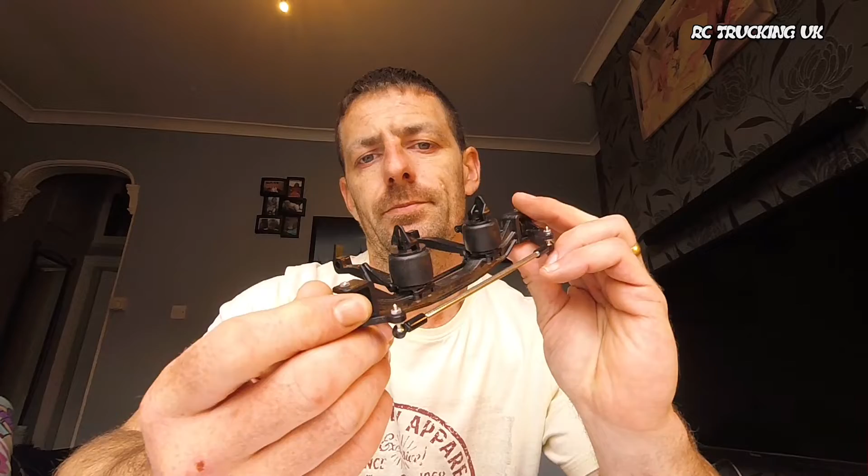That was the airbags, fitting these airbags. It was a bit confusing because we didn't know it would have worked out until I'd actually put it together with glue. If you remember, I was on about the original being on the springs. Yeah, it all worked out with glue. It held up alright, and they do rotate and position into place where you need them to be. So I'm really happy with that in the end.

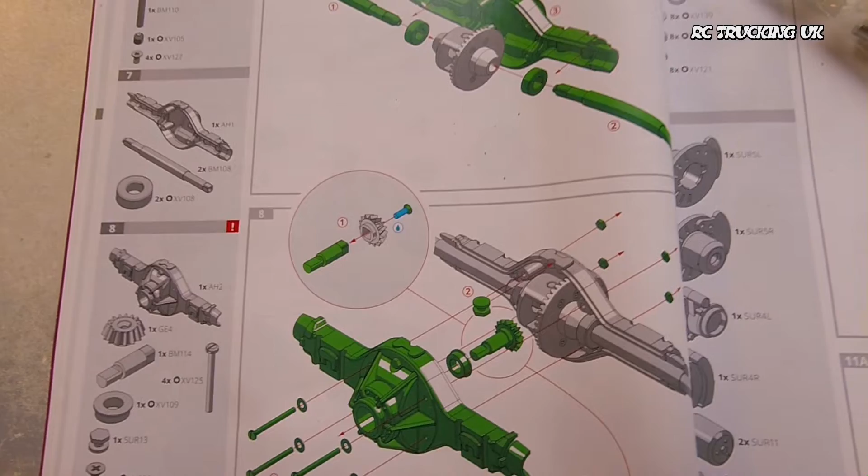In this one, moving on, we're going to be constructing up the rear diff. Now it's only a few parts - I've just popped all the parts needed into this little bag. There's not much, and we're just going to do this step 6, and then we'll come back in another video and do step 7 and step 8, which is the rear axle casing and the bearings and the little drive diff, the gear that comes off the prop shaft to rotate the diff. We'll do that in the next episode, and that'll be step 7 and 8 out of the way. Then it's coming on to basically the rear axle mounts and the arms for where to sit the axle and stuff.

Yeah, that's much more progress. Then it's the airbags and prop shaft, and then I'm presuming onto the chassis point. So I'm going to break a lot of this down now to make it more of a simple step by step, and it's not too much. So, the rear axle diff.

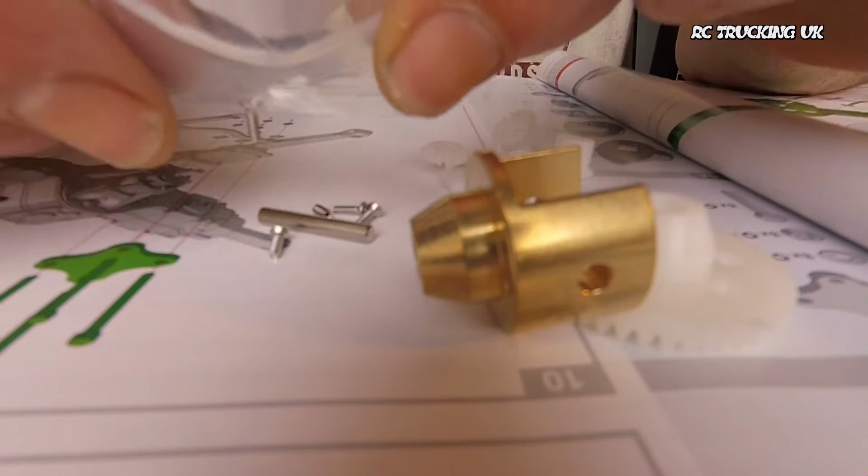First things first, I'm going to just trim up all these little part edges where we've broken off the trees, and get them all nice and neat.

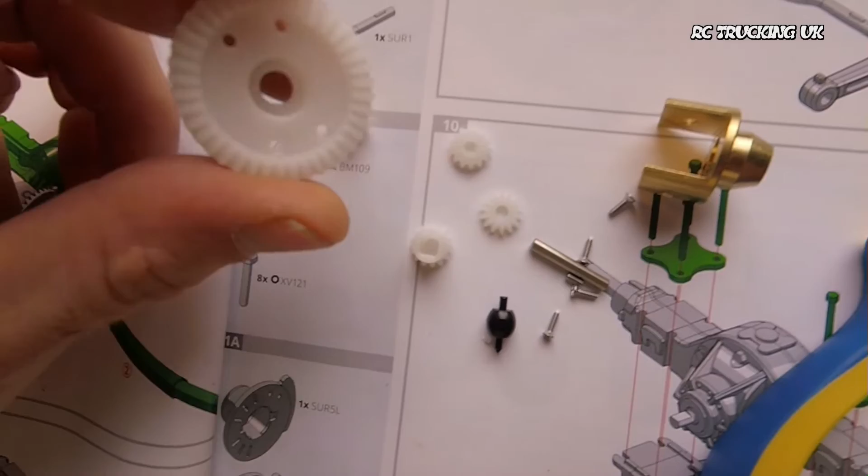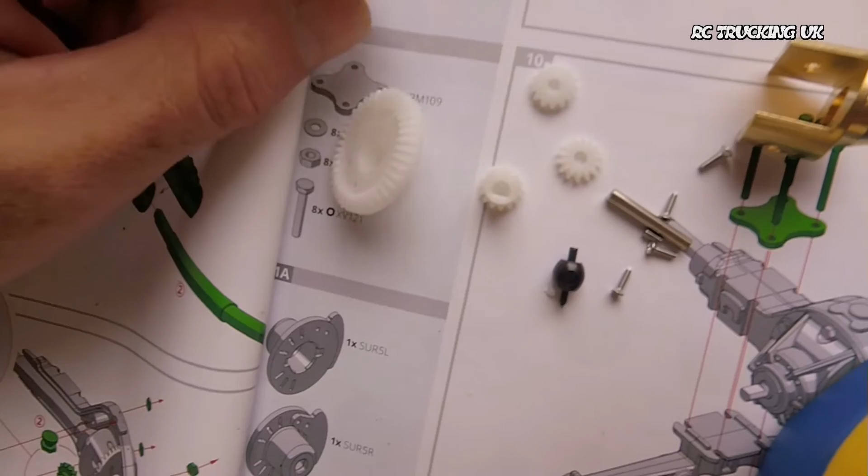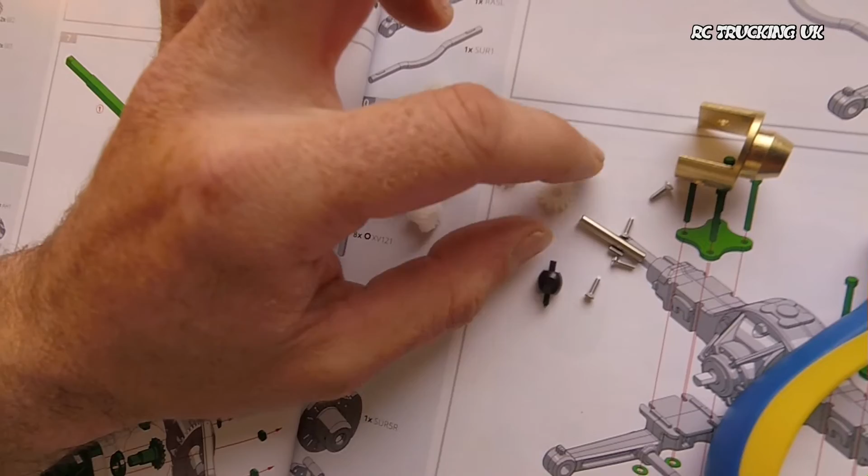So now that's all done - you may have noticed these gears are constructed from nylon, not the usual metal diff gears and bevels you'd find in the Tamiya. However, this isn't a fast running truck, nor is it going to be under any stress - well, mine in particular isn't. I don't know about yours, but nylon does have a good reputation of holding up. No doubt there may be metal gears you could replace these with in the future, or if you shopped about you may find these in metal. But it's not an issue to me.

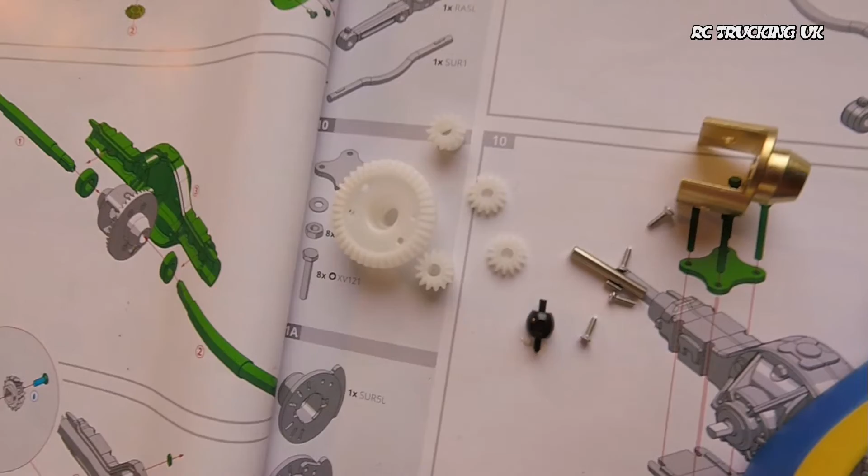Anyway, on to the first part. The first bit is I'm going to need this, that is metal. There's smaller ones and your taller ones, so we're going to need the taller one, and by the look of that, that's going to just sit inside this little hole there.

This is where it may get a little bit fiddly. Is there a front and back to that? No. So this one's going to go into there. This is fiddly because we have to then get these little gears - one's to sit on the bottom with the gears facing toward the middle, and the other one is to the top, and then we're going to hold it all together at this part here.

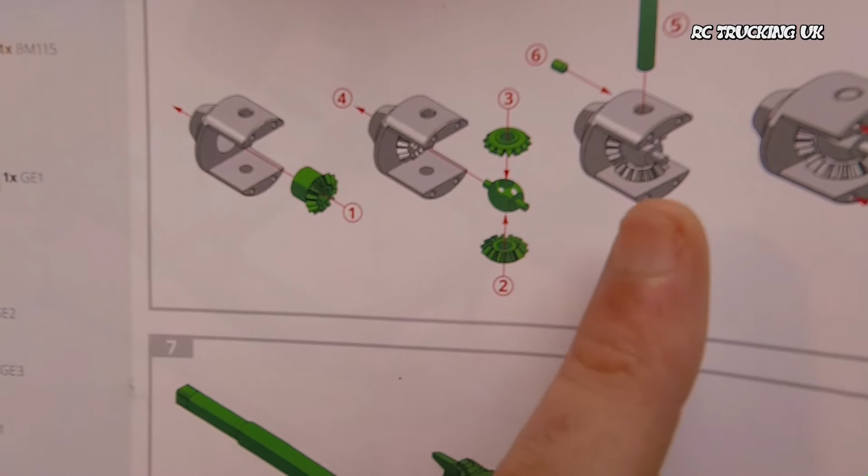There we go. A little bit fiddly, but you can kind of see how that's gone together. So now we're going to need to hold this bar in with a little grub screw here.

So we've got a small grub screw there. Now it doesn't say anything as to needing Loctite - there are areas in the manual where Loctite is required, but it's just going to bite against that arm through there, and that'll just prevent it from falling out. So we're going to need a really small Allen size bit. Now then, so now we've got a nice small bit, and that is an H09, so it's a really small Allen key.

Now we're just going to screw that into there basically till it bites, and then just give it an extra little tighten up. There we go. So it's not too difficult, but a little bit fiddly.

Now there's also no mention of greasing these gears either, however I will be using some grease. So now the next step is the other taller gear bevel, and that's just going to sit basically against the other two flat ones, and that will sit over it there on the top, locking it into place.

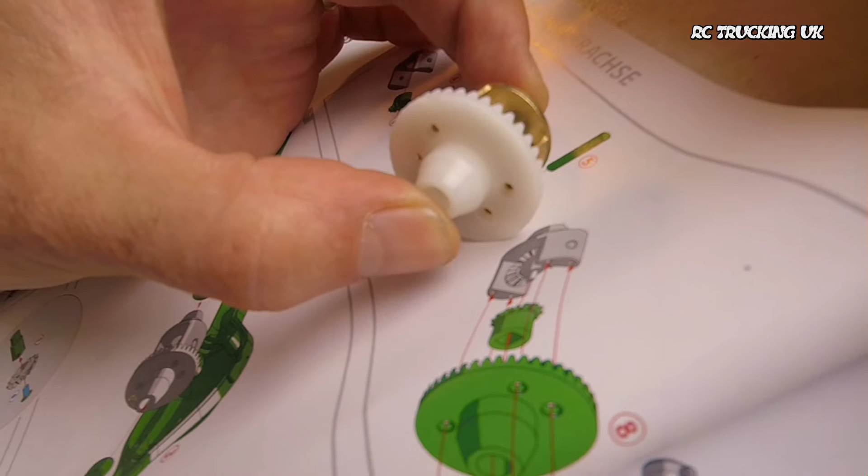Then to the rear we've got the 4 tiny screws, and that's just going to thread through the little threaded holes on the back of the big brass bit there. I'm not going to tighten them up yet until all 4 are in - I'll just work that in like a little cross motion. Then just give them all a little bit finger tight again, just to make sure that they're all tight enough in place, but not over tight.

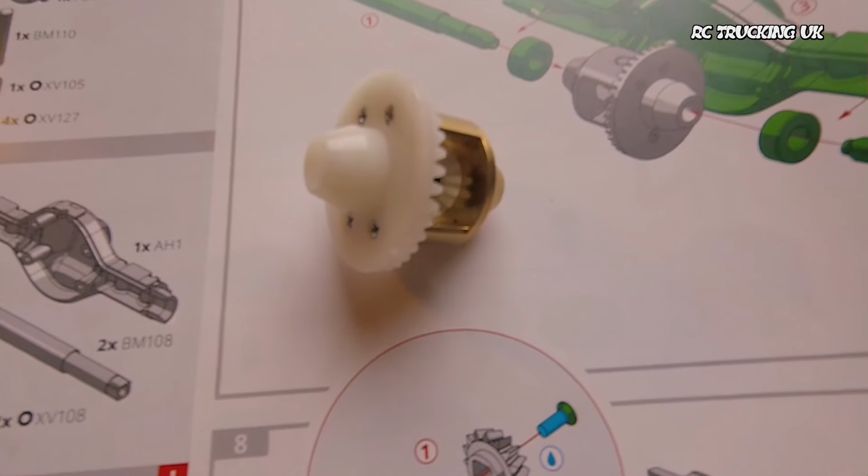And that, guys, is step 6. So a relatively easy one, and in the next one we'll come back and do 7 and 8 of the axle housing and the other gear to drive the diff.

Slowly making progress, enjoying it so far, and getting a bit more eager to see more as it comes on. Yeah, I'm actually looking forward to getting it finished. Still no wiser with the colour choice yet, which I really do need to start booking up and having a serious think on what colours I do need. Then I can start getting some parts pre-painted and primed and ready for putting it all together.